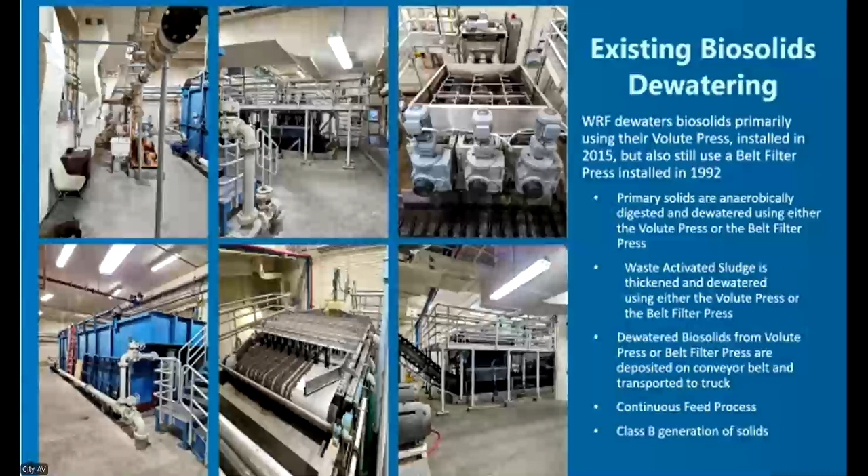So Class B is very common, probably the most common class of biosolids in the country. If you go a little bit farther with inactivation of the microbes, you can get to Class A, and you're freed up a little bit with what you can do with that product versus a Class B. So just keep that in mind because it'll come up a few times.

So we started the project working with your staff to figure out what's the current population, what's the basis, how much biosolids are produced per capita, and then doing population projections for the life cycle of the project. We chose 20 years, which is very common, and worked with city staff, and planning told us to use 2.5%. So that made things easier than us trying to project or come up with our own numbers. That was nice, and then we project out the biosolids loading based on that. So this table is the summary of all that data.

The first row there takes you through the project life, 2025, 2030, out to 2045, and the dry tons produced. So next year, you would produce about 765 dry tons. That's taking all the water out. It's just a way to make sure we're talking apples to apples, only talking about solids, regardless of the moisture content of that biosolids, all the way up to 1,260 at the end of this project life cycle, in dry tons.

The volume of those biosolids depends greatly on how much water is inside them. So 15% is roughly about where you operate now. 18 to 20 if you really push a good dewatering process as possible. So we included those numbers, and you see the number of trucks filled up per week drop from 6, 7 to 5, 6, just to give you an idea of the volume reduction. And if you can push that all the way up to 25%, then your volumetric production almost drops in half. So quite a difference when you remove some of the moisture from the biosolids.

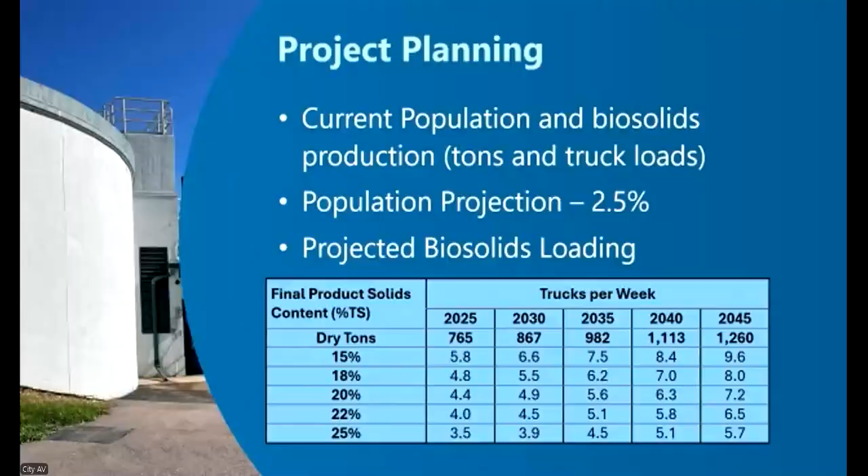So we talked a little bit about the project need, but the urgency was really brought to bear because of Glacier Gold's tentative plans to get out of the business, or at least the Olney bagging and distribution center. My understanding, and I'm not sure if this is the latest, but some of their facilities may stay in operation, but they're ready to move on from Olney. And so that puts you all in a lurch.

So the city RFQ'd the project, and at the same time had a little bit of concern that with a little bit of PFAS that you have in your drinking water, perhaps there would be a PFAS issue on the biosolids. So that really led to kicking off this project.

Glacier Gold historically has provided about 70% of your biosolids disposal, with landfill being about the other 30% on an annual basis. As I said, they're closing down the Olney site. There was discussion of would the city be interested in taking that over, or handling Glacier Gold distribution. Honestly, that's a big apple to bite off. It's a lot of staff just to run something like that. So that wasn't really pursued here.

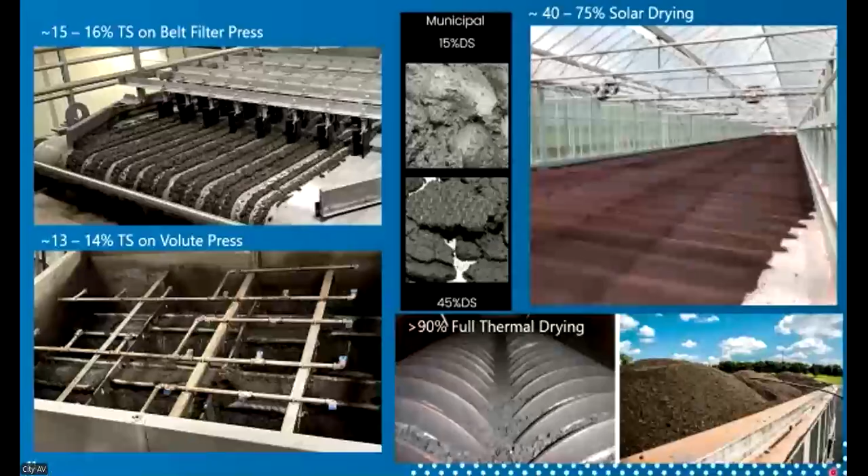Aaron talked a little bit about your technology, which is on the left, the belt filter press in the upper left. That's about 15 to 16% solids there, kind of a wet cake consistency. 13 to 14% on the volute press because it runs it through a little faster.

It's hard to see there, but it does not have free water, which is important. There's a paint filter test that's exactly what you'd think from the description, where it was meant to put paint on a screen and see if any dripped through. Well, it's become kind of a rule of thumb test for biosolids and whether or not you've done a decent job of dewatering it. To my knowledge, the city's biosolids have never failed a paint filter test, so it's not giving up free water. It just has a little more moisture content in it.

In the middle there, you see 15%, which becomes more of a mud. 45% becomes something you can squeeze and it would hold its shape like a moist dirt. And then on the upper right there is 40 to 75% in a solar drying facility, starting to become essentially dirt like you'd find on a baseball field.

At 90%, it's really dry. In fact, sometimes you have to have provisions to make sure it's not combustible or in an atmosphere where it could be combusted. It's dusty. At that point we're trying to get it into a granule that'll hold together so we're not creating dust, and pushing this too far could be a dust issue for the landfill at some point too. So we kind of have some guardrails here on where we want to be.

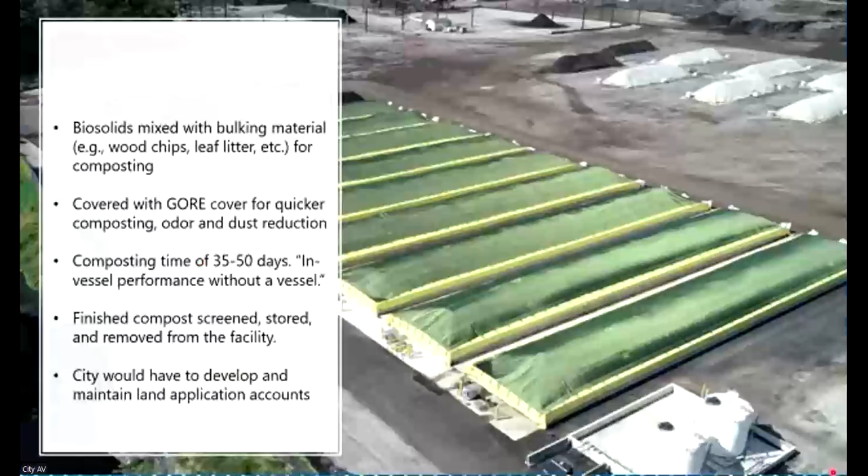Composting, there are several different ways to go about composting of biosolids. There's sort of a heavily mechanized, shrink the footprint, get it inside a building approach. There's an old use-a-lot-of-land and just push it around in windrows approach. And then there's this sort of middle of the road approach where you would build concrete beds and use a Gore cover. In this case, that's the company that makes these, to just try to cut down on the amount of dust and odor that's produced, but also speed up the composting process a little bit to get to like a 35 to 50 day residence time underneath there.

Is there PFAS in the Gore cover? They are moving away. There has been historically, that's the same Gore company that manufactures PFAS or has, and going to, I believe it's a polypropylene PFAS-free product. Yeah, that was discussed numerous times with them of how do we get over that.

The finished compost underneath there would be screened, which is an operator intensive process. And the better you screen it and the less plastics or anything you have in the amendments that you're going to have to use, you can't just compost biosolids. You have to add sawdust or wood chips or leaf litter or something and mix that in. That can greatly affect what you can do with the end product, whether you're able to sell it or you have to give it away because it's just not that aesthetically pleasing of a product or whatever it might be. So don't underestimate that. But then I think one of the biggest challenges there would be having staff essentially manage distribution of that composted biosolids.

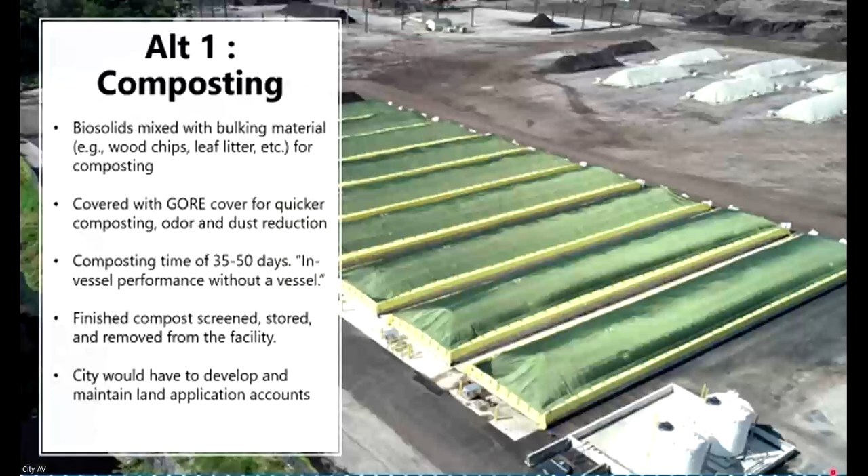So composting is intended, if operated well, to get you to a Class A product. So you can use it for lots of different things, including putting on your gardens at home. But...

I would emphasize the operator intensive nature and the time and temperature it takes to get to that Class A product requires more equipment or more land. If it's really high quality, you could potentially sell it. If not, we know cities that have to give it away.

I'll say it has relatively low operations, maintenance, and replacement costs, but that is relative to some of the very intense processes that we're comparing it to. It would still be additional employees, numerous additional employees that the city would have to hire to do that. It does have a long track record. The industry's been composting biosolids for a long time with success.

The disadvantages are, as I've just said, it's operator intensive. You have to go get a woody amendment and you want to have reliable long-term sources of that amendment. You need a fair amount of land or a new building. You don't destroy PFAS with composting. It's going to require a lot of management, a lot of administrative time, and all of that. And it didn't come out as what I would call inexpensive.

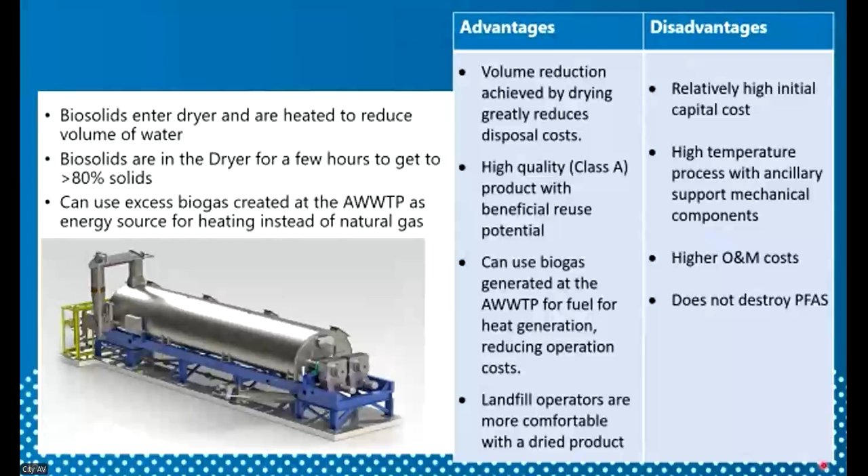I say before you move on, the option one and also this maybe option two, but either one where it's kind of composting or distributing on land. In terms of the report that we read through, there was a section on environmental impacts. I do think if we're not removing PFAS, there should be some discussion in that report about the potential impact of PFAS on distributing that into the community. I understand we don't know what the PFAS level is in our product, but it should be a point of discussion in the environmental impact section of those two alternatives.

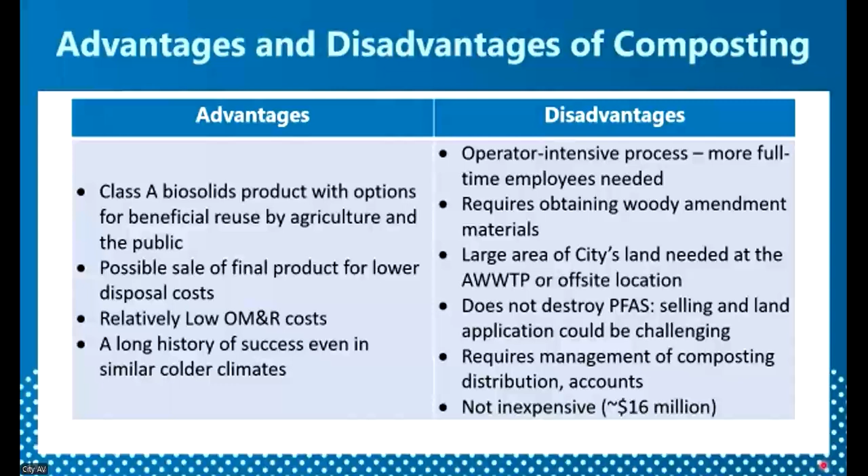Okay, we will beef that up a bit. Thank you.

Alternative two is drying. 2A would be full drying, 2B would be that more experimental partial drying. The advantage of full drying is you greatly reduce the volume of the product, so you have lower tipping fees if you're going to the landfill, for example, or fewer trucks if you were composting, going to your composting facility.

But you'd have to add water back at that point, because composting ideally wants like 15 to 20% biosolids. But we would use, for any of these technologies that are requiring heat, Aaron's got extra biogas out at the facility that we would plan on using no matter which technology we move forward with, which is nice.

It is Class A inherently. You get it that dry, you've killed a lot of bacteria, a lot of pathogens. So it's basically a slam dunk that you're Class A at that point.

Obviously, the landfill, other than potential for dust, was comfortable with a dried product. They would just have to incorporate it a little quicker to keep it from drying and blowing around.

But the disadvantages are a relatively high initial capital cost - you get there on your screen, costs, I believe, over $4 million. And equipment costs are just a portion of total project costs because we need lots of ancillary mechanical, plumbing, heating, electrical, et cetera, building space to house it. So this quickly became slightly more expensive than the composting even. It's a big project to do this.

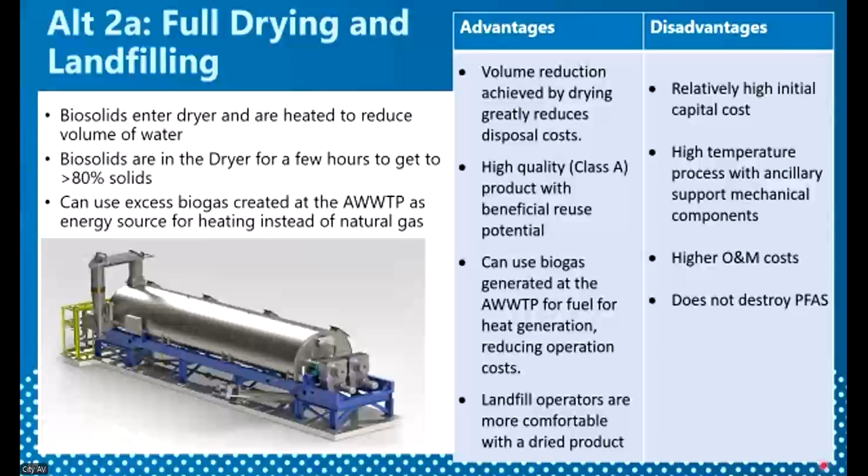Generally higher O&M costs associated with these because you are taking the biosolids to 90%. So you can imagine the wear and tear on that equipment and the operator attention it requires. And even though you're using heat and drying it, you're not destroying the PFAS.

Partial drying is - we define that as 45 to 80% biosolids. There's a couple of alternatives here. One is that short circuiting I referred to earlier. The other is this new process called ELODE that seems to be trying to fill this hole or vacuum we've had in biosolids drying for a long time. But that ELODE unit is only in, I believe, 2 plants in the U.S., and again, not a tried and true long track record product that we like to have in these situations.

You would get substantial volume reduction. I showed you just getting from 15 to 25%, you drop the number of truckloads you generate in half. If you take that to beyond 45, then we're drastically reducing the volume of sludge coming out of the facility. We can use the biogas. We know the landfill would be comfortable with it, but it does have a relatively high capital cost.

That equipment you see there on the left is not quite as much as a thermal dryer, but it's close - so multi-millions of dollars on the left-hand side of the screen there. It would not be a Class A final product because you haven't dried it out enough to the point that cells have desiccated and you've destroyed pathogens. And it does not destroy PFAS either.

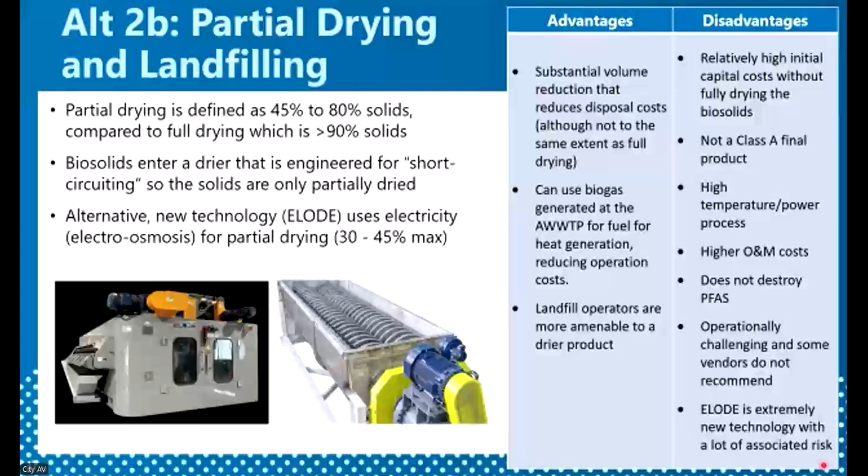It's operationally challenging because you're kind of trying to hit that friable dirt sort of consistency there, which machines don't really do well with. So there's more attentiveness needed from your operators. And like I said, that ELODE technology is a little too new for our comfort.

Pyrolysis and gasification. It's a really interesting process from an engineering standpoint. I think it's promising, but it's also brand new. These technologies are coming out of laboratories and trying to get to public works projects, and they have no idea how to execute projects in the US, for example. So there's a lot of hiccups with this. It is intense, as you can tell, lots of ancillary heating, exhaust gases produced, a lot of plumbing, mechanical, electrical, et cetera.

Once you do get that going, the biosolids is the fuel. So you're heating it up to 1,500 degrees Fahrenheit and driving off the gases, then capturing the gases and using it to drive the process. So, like I said, it's neat and interesting, but it's very young.

What you would get out of there would be almost a sand-like product. It's fully cooked, so you get tremendous solids reduction. But with all that said, you get 99-ish percent PFAS destruction, but the capital cost for that is huge.

It's an outlier. That equipment package alone right there costs $12 million. So you would need really heavy, in my opinion, regulatory pressure to push you to go do a project like that. And again, you would be on the cutting edge at that point, going through lots of hurdles and hoops with that manufacturer to get that project completed. We don't even know if they're going to have the production capacity that potentially we're all going to ask of them to generate these for projects that do need some PFAS destruction.

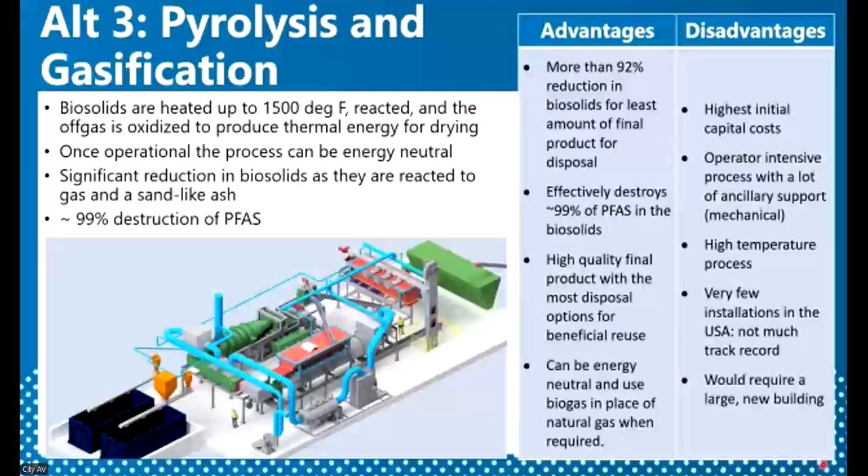So this is very specialized. This is going after PFAS. There are no municipal wastewater applications of this at this time. I believe there are landfill leachate applications of this technology. But again, very, very young. You would get a huge reduction because basically everything's destroyed at that point down to inerts. So you have that sand-like product coming out of there.

97% reduction in biosolids by volume, 99%-ish destruction of PFAS, a Class A final product, but not yet proven in our industry, operator intensive, and not something that your operators would work on, but something you'd have to call in specialists to work if there was a failure.

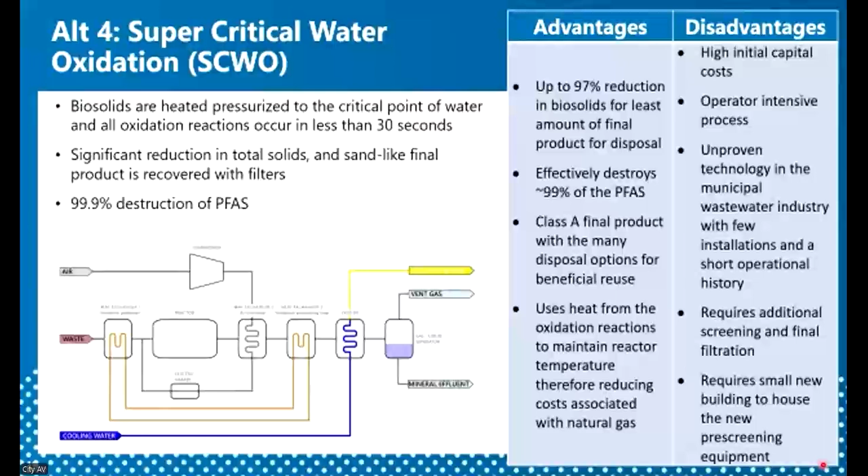It requires an additional screening facility. So you've got screening on your raw wastewater out at the plant before it goes into the liquids treatment processes. You'd need yet another one on the biosolids before you put it into that reactor. And it does require a small building. So, expensive.

Finally, alternative 5, which is just improving your dewatering operations a bit to try to get a product that the landfill can work with on a consistent basis and is comfortable accepting, having a long-term agreement with you to continue having you deliver it there. This would entail demolishing the dissolved air flotation tanks that Aaron showed you in that first photo. You have 2 out there. You would free up a lot of that space there.

You wouldn't need that equipment anymore because right now it's just thickening waste activated sludge before it goes on the belt filter press. You would replace the belt filter press that's 34 years old at this point with that unit in the picture there. Get rid of that so you don't need the DAF anymore. And you would have 2 of these, the one you bought 8 years ago and this one. You would get a new polymer feed system with this, replace your WAS pumps to give the operators better control over wasting off the biological processes and sending that to your dewatering units.

So the whole goal here is to get 3-4 percentage points more dryness out of your cake and have more reliability as well and redundancy. This alternative has the lowest life cycle cost. It uses a technology that your operators are already very familiar with because they're operating it 24/7 every day. That 24/7 operation, not always manned, is a huge advantage. You can't do that with many other dewatering technologies.

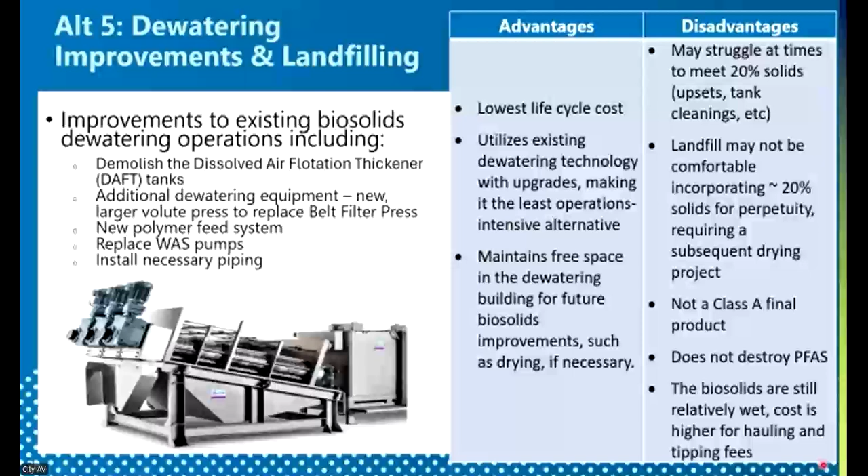Question about some timing questions. So we have Glacier Gold that might extend the contract. In terms of these different options, is there a difference on how long it would take to get them up and functional, so that we might be able to make the deadline with Glacier Gold, others we wouldn't, or?

Yes, and honestly, dewatering is far and away the easiest to implement quickly. You would still have to pre-procure the equipment to move as fast as possible, which is not something that's always done, but it's a somewhat common move to jumpstart a project. You know exactly what piece of equipment we need from PW Tech, so we can move fairly quickly there and they can start with shop drawings, and if we approve those, start fabricating that equipment before you necessarily have all of your loan in hand and your general contractor or your construction manager at risk, or however you decide to deliver the project.

And the reason it's potentially fastest is it's the most straightforward, common approach. These other technologies, other than drying, are longer lead time equipment, more complicated equipment, manufacturers that have yet to really be put through multiple public works project deliveries in the United States. So expect hiccups and roadblocks and having to overcome a lot of that. This is very straightforward, we know how to do this. Not just we, I mean the industry knows how to do this.

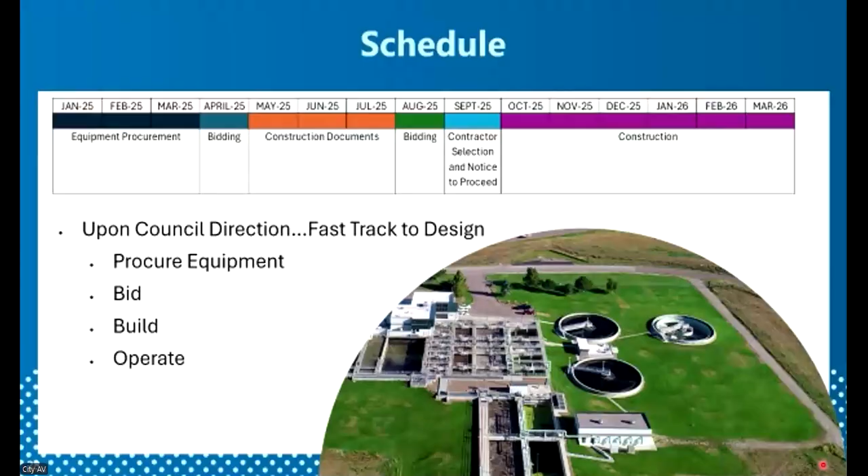So then my other question is related to the landfill and kind of the uncertainty there, and maybe we'll hear more about that. But right now they're willing to take the roughly 20%, but if they change their mind, it could change in a year or 5 years or 10 years. If we put 3 million into alternative 5, how long would we say it was worth it? If the landfill changed their mind, we'd have to go with alternative 2 and drying to get a drier product. In other words, I don't want to throw 3 million dollars away in alternative 5 only and turn around and have to do alternative 2 a few years from now because the landfill changed their mind about what they're willing to accept. I'm wondering how long do we consider it to be a good investment before we have to switch to alternative 2, if you understand what I'm getting at there?

Yeah, I think it's a great question that we've all asked ourselves a lot in the last month or so. One aspect of that project that makes us feel a bit better is that belt filter press is 34 years old, I believe now. You would need to replace that anyway soon. So making the move to put in a new volute press, when you're very happy with this 9-year-old but somewhat undersized volute press, undersized to handle all of your biosolids all the time with no backup, is where I'm going with that. You would need to do something on the dewatering end anyway, even if you put in a dryer.